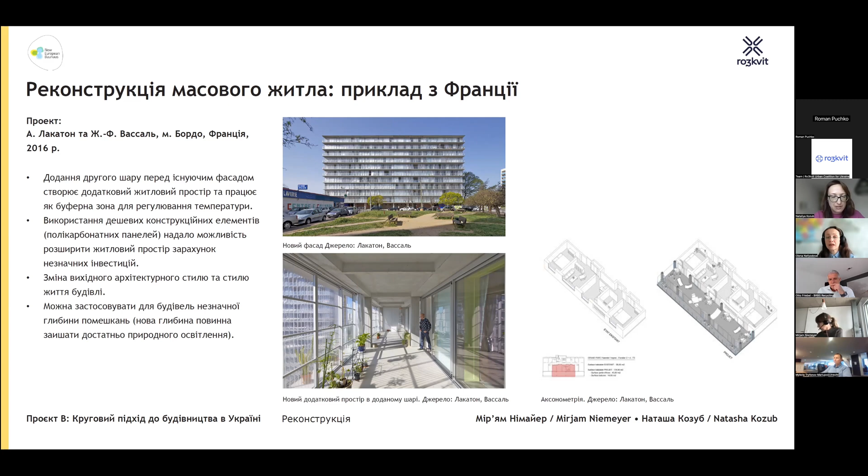This project cannot be applied to all of our panel buildings because it has its own special features. For instance, these flats are of low depth, and so when you add the gallery, we keep them lit enough. But this example can show us that every building can be approached in its own way to be made better.

This is an example from Germany, because in Germany we have quite a lot of post-war mass market housing. This used to be a 5-story building which featured 125 absolutely identical flats.

During the renovation, it was replanned and it got new galleries attached, and the upper floor got its own penthouse with a terrace. Even such sad buildings can be improved in their architectural qualities, and it is clear that these projects are not cheap and they require architectural planning.

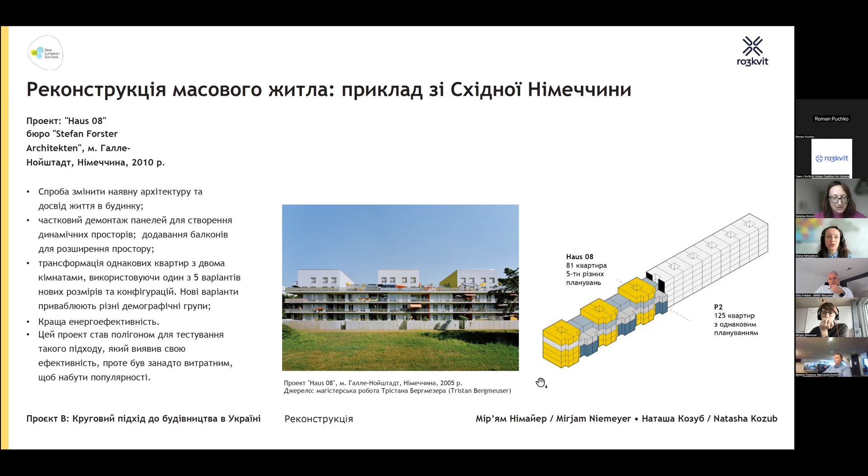And we know that in Ukraine, renovation of multi-story buildings is not conducted just because we don't know how, we don't have any projects. That's not the case. Our research shows that it is not performed because we lack legislation and we have property problems attached to it, but there are architectural approaches, and it is possible to preserve such houses and reuse them.

Then we had a look at one-family houses, especially rural houses, which were built after the war starting in the 1950s. This is called a typical rural house of Soviet times. Starting in 1990, around 3,800,000 people moved from rural areas to cities, and this means that quite a lot of rural houses stay abandoned, and they can be used to, for instance, house IDPs.

Yes, these houses have a lot of drawbacks. They are not energy efficient. Very often they are using asbestos containing materials, mineral cotton wool, rock wool, which is a dangerous material to use in your house. But for this slide, we are also showing the results of the dissertation of one of our colleagues from London Architectural School.

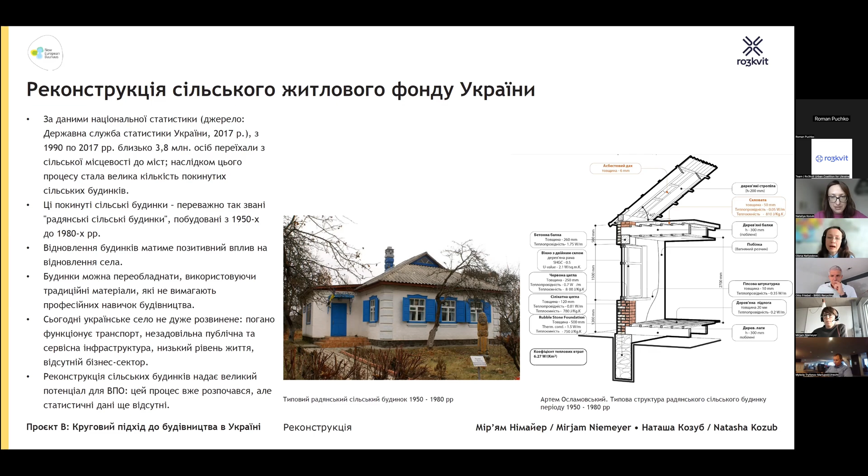Artem Oslamovsky showed that if you invest just a little money, the energy efficiency of such houses can be boosted greatly. So you can see coming from 6.21 watts per kelvin square meter, we can reach 3. So we can halve the energy consumption of such a house just by using specific materials for isolating its roof.

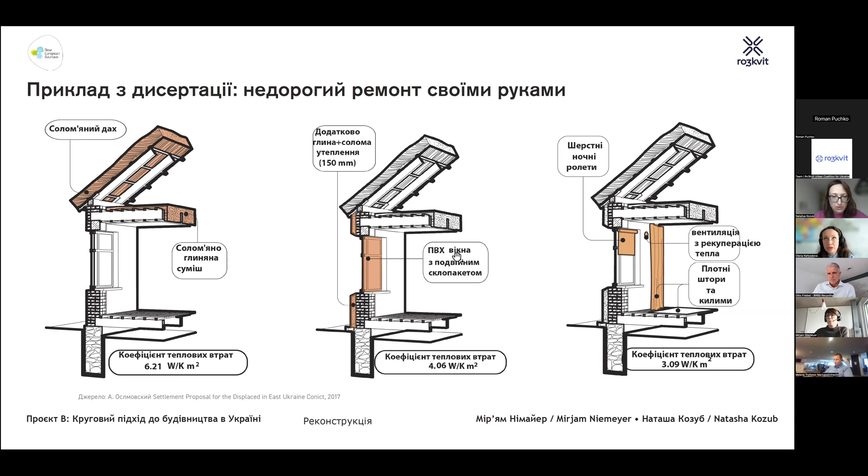So these changes, alterations are possible for people to do on their own, because the materials used include straw, include clay. So these are rather cheap, available and affordable solutions.

To move further on, we would like to talk about the reuse not of houses but of the elements, and I would like to give the floor to Mirjam here again. Yes, thank you, Natasha. Exactly. After talking about possibilities for renovation of existing buildings, we also focused on the potentials for the topic of demolished buildings. When we look at demolished buildings, it's relevant to talk about the reuse of building components and the recycling of building materials.

Here, can you go back? Still one. Oh, okay. I have another order. Sorry, I have another order. Maybe, yes, please this. In my version, I had another order. Okay. So first this and then go back.

So, of course, a very relevant topic is the reuse of concrete panels. The reason for it is that in Ukraine there is a lot of panel housing existing, so there is a high potential for studying the reuse of it. And in general, looking at other projects in other countries, studies found out that approximately 30% of panels can be reused as a structural element.

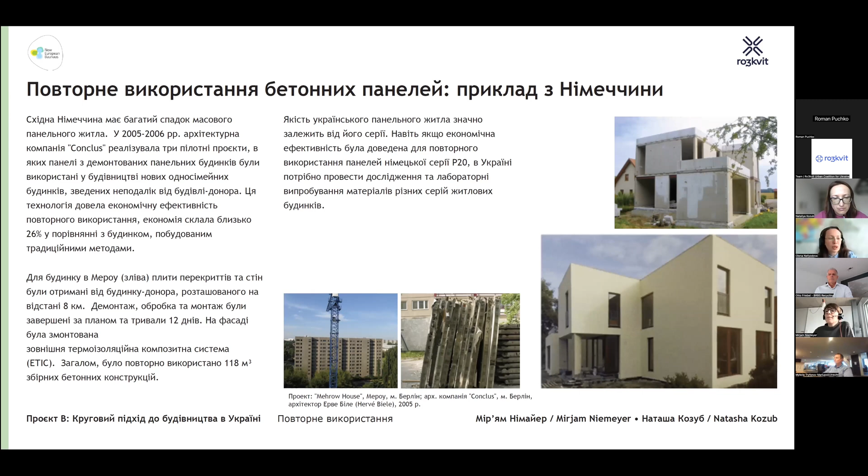After the next, yeah. Yeah. Okay.

So this slide is about the reuse of steel and structural components. That's also a very important topic, especially since steel is used in the context of industrial construction very often. The reuse of steel is also very relevant because it's a high energy demanding process to produce steel. So that's why the reuse of these structural elements, which are usually very easily assembled and also easily disassembled, has a big potential.

Of course, because steel also has structural qualities, certification is needed, but it was tested already in many countries to reuse such kinds of beams and structures. For instance, here you can see a project in Norway where, all in all, including also other materials, almost 80% of materials were recycled. Next slide.

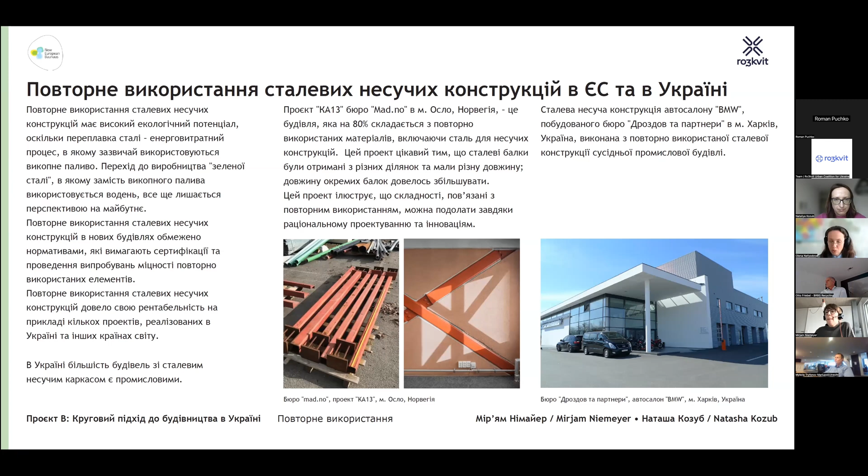Next slide. Another aspect when we look at building materials and components is, of course, our bricks. Bricks are usually already recycled in Ukraine. Maybe some of you know projects. Most important is that the bricks from younger times don't have so much quality, but the ones from the times before the 70s actually have a very good quality.

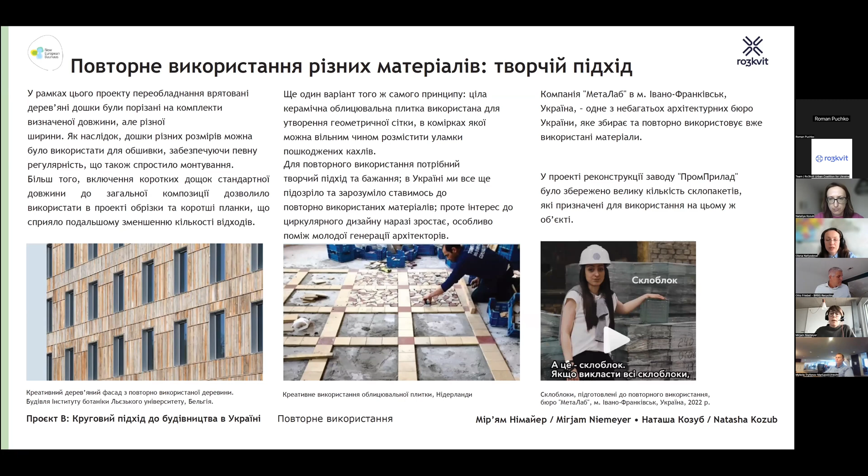Maybe I have again another order.

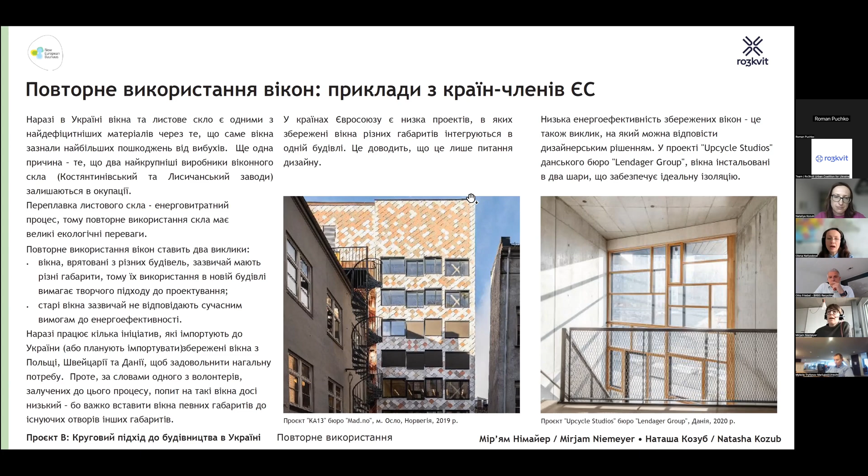And then on the right-hand side you can see another approach where different windows of different sizes were rearranged in a bigger glass facade. So then please go back to the slide before, or in my version the next slide.

So there are actually also examples of the reuse of windows in Ukraine already. This is an initiative from Switzerland which is gathering windows from construction sites and sending them to Ukraine, where they are already used in a series of renovation projects. Of course, in the first place, maybe it doesn't make so much sense because it's a huge work for transportation and also creates emissions.

All in all, the carbon emissions, when you look at these, are still lower. That's interesting. The reason is that production of glass is so high energy demanding. But looking at the scarcity at the moment in Ukraine, it's a very important project actually.

Okay, now back to Natasha, who will talk about, no, sorry, I have two more. So then, next slide, please. Sorry for the, yeah, okay, so destroyed buildings, yes.

So I want to also very shortly talk about the recycling of building materials. We have, of course, also looked at a general approach, what kind of waste is actually generated when a building is demolished. And looking at Ukraine, it's data from 2017. One can say that around 80% is concrete and masonry. And the rest is wood, PVC, gypsum, glass, wool. They are pretty low percentage. And looking at this, of course, concrete especially has a very high potential. Next slide.

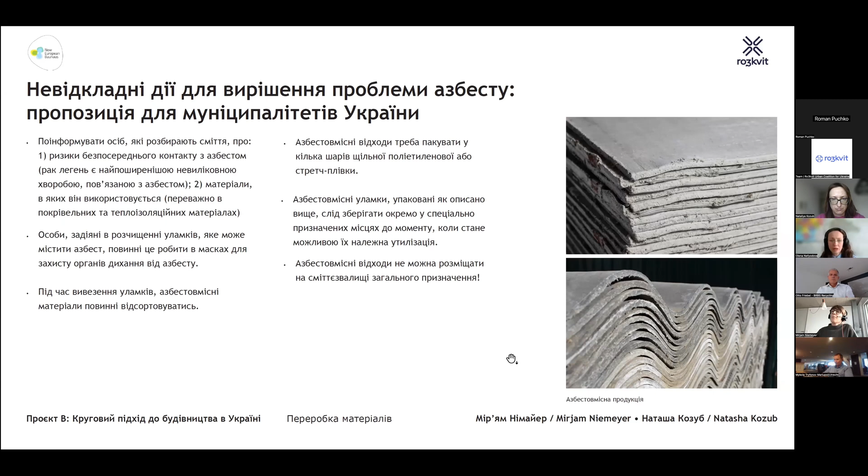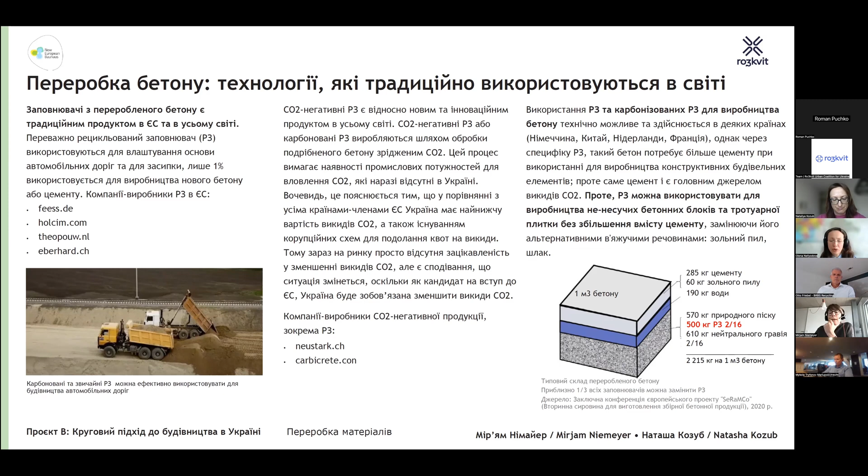So the next slide will be... it looks different now again. Sorry, Mirjam. What is it about?

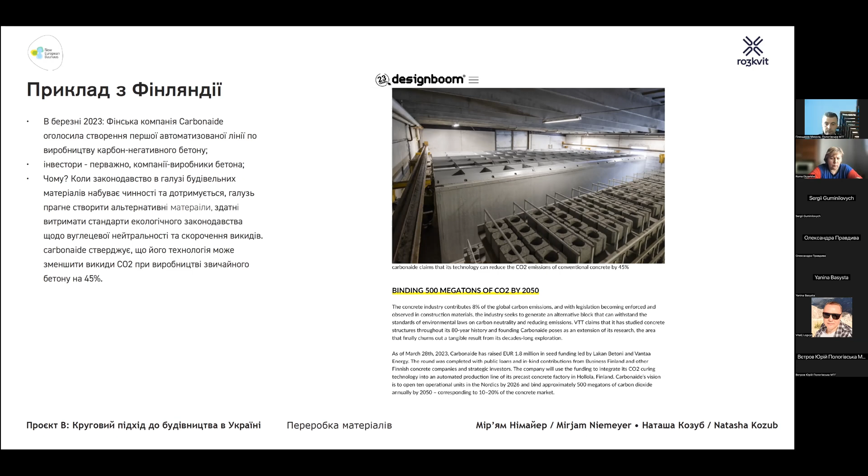Okay, now you have the smart crusher still in it?

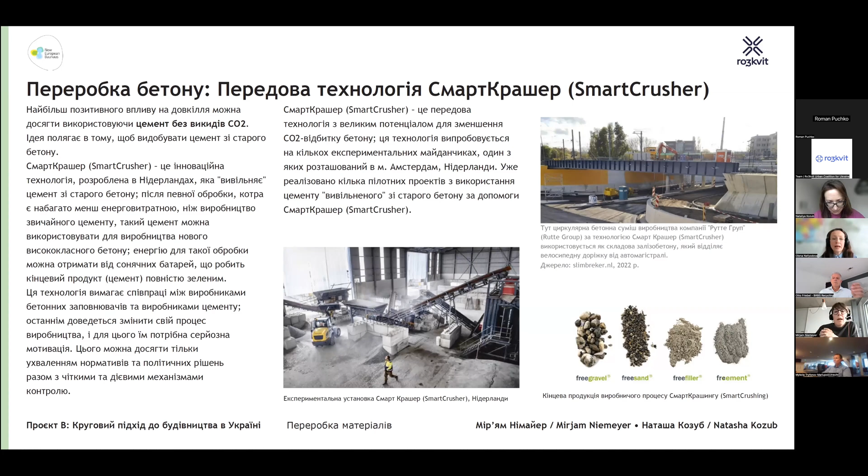Okay, now Natasha, it is your turn.

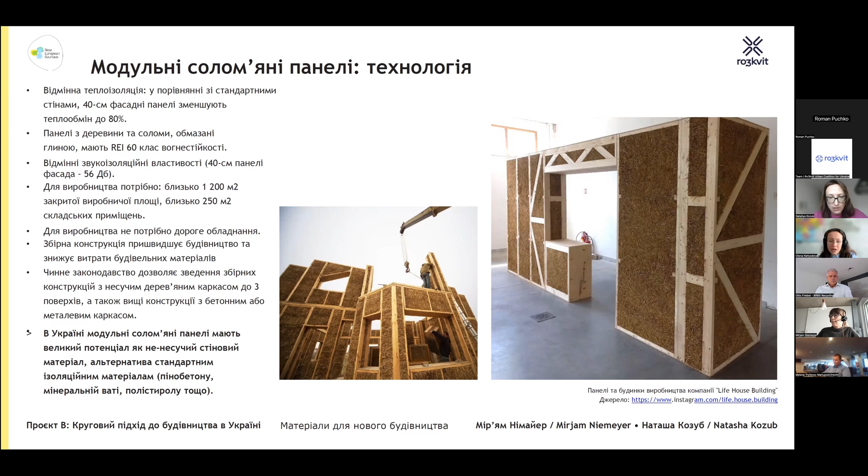We are doing the same from panels of pressed straw, which has a very high fire resistance class. So it is not burning. It is smoldering very, very slowly, and it is certified. At present, our legislation doesn't allow us to erect houses higher than 3 floors using straw, but if you use the hybrid approach, that is, you combine, say, concrete structure and straw walls, you can make it higher than 3 floors.

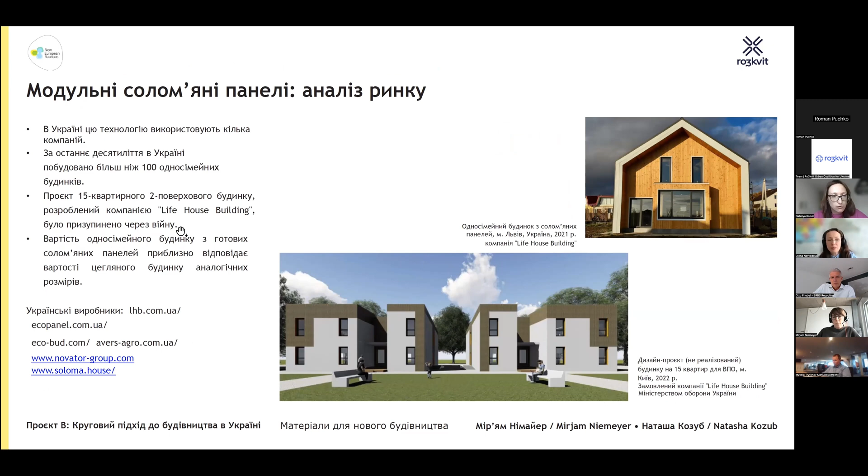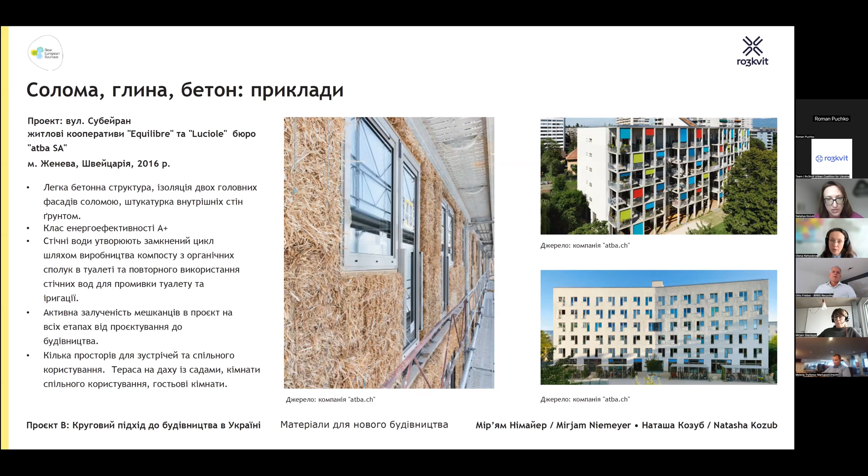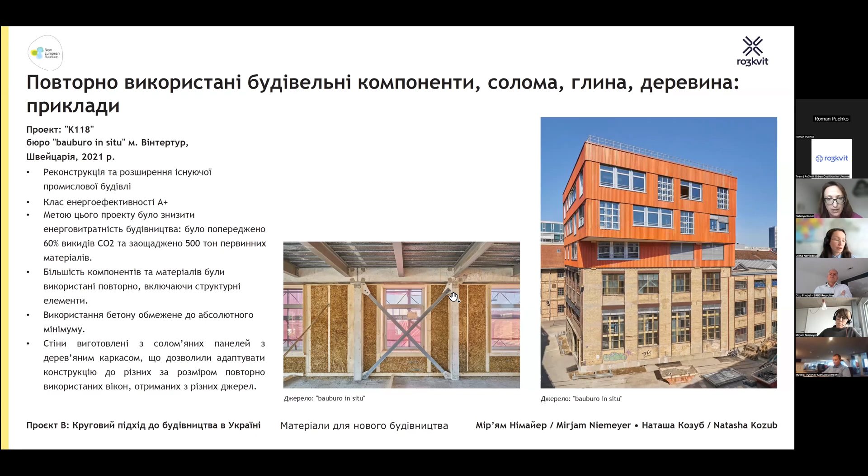It has a concrete structure and straw walls, and inside they are plastered with clay. The house is A+ class of energy efficiency. Another interesting thing about this house is that it is a housing cooperative and actually built by the residents. This is another example from Switzerland, and here it combines reused steel, reused concrete, and also newly produced straw panels which are plastered with clay.

And another interesting material is hemp, and it is also grown in Ukraine, not to a large extent because the legislation prevents it, but hemp can be used for making hemp concrete, and this mixture of lime and hemp can be used to cast in situ the walls. It is a brilliant material for thermal insulation.

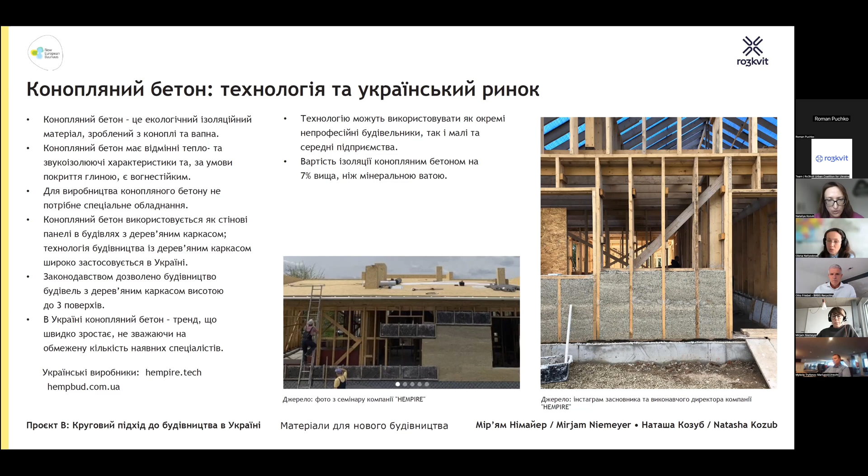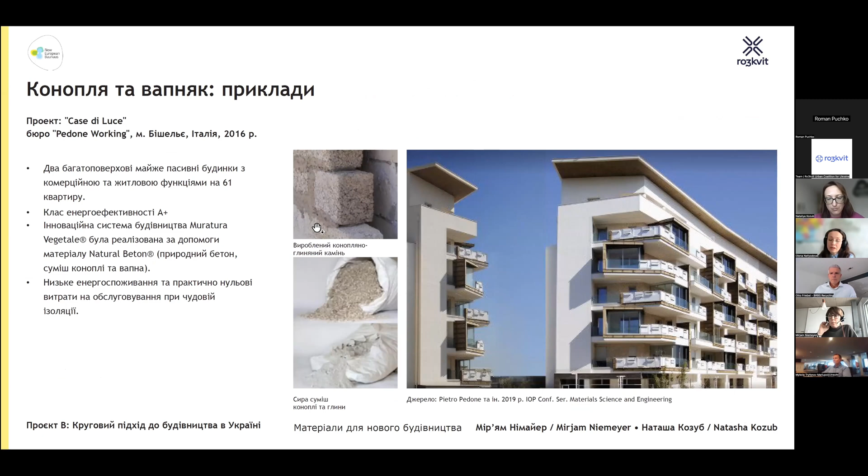And in the middle, you can see the photo from the webinar, which was conducted in Lviv region. And this is the house for IDPs. So hemp and lime. Here is an example from Italy. Again, this house has a concrete structure, and the walls are made from hemp and lime.

Timber clearly is a good construction material, a good circular material, but even before the war, we had a certain deficit of timber resources. In many regions, we had few forested areas, and so if in the future we are building only from timber, we will not grow it fast enough. So our idea is to use timber only when it is necessary.

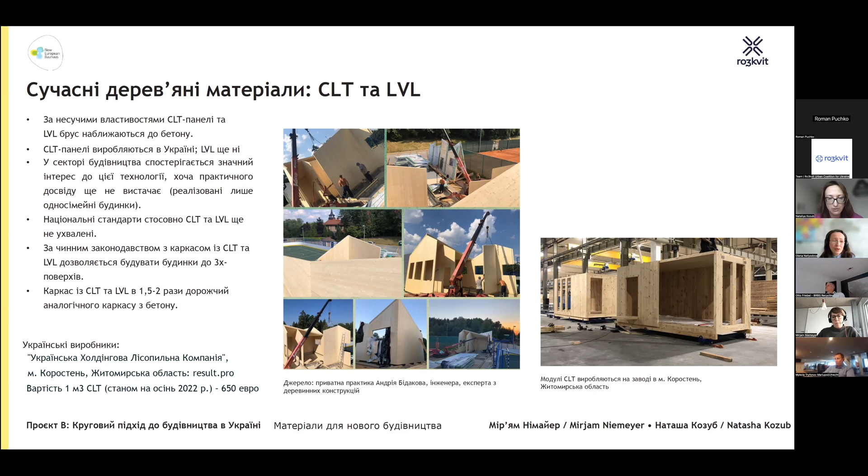For instance, today we have very popular technology of CLT and LVL beams. CLT is cross-laminated timber, or glue lam timber, and these are composite timber materials. We have a plant producing them in Ukraine, but it is rather expensive, and the structures would be approximately 1.5 times more expensive than concrete constructions, so it would be rather expensive to use them as structural elements, though it is very interesting, of course.

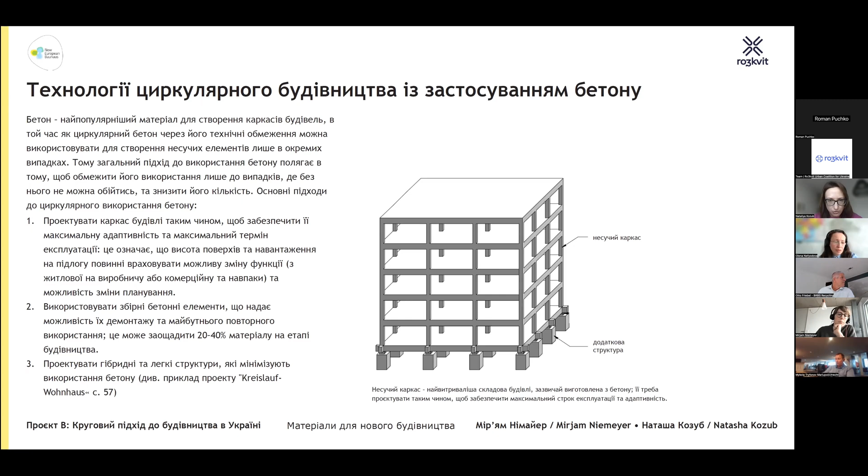And traditionally we built a lot from concrete, and many people are now saying that we must embrace only cast in situ concrete because in the future the houses must sustain missile strikes. But yeah, we will have to embrace it. Yet our idea is that concrete is not ecological. Concrete pollutes the environment, being responsible for 8% of carbon emissions, and so we must reduce concrete usage to the minimum. Or if we're using such structures, then we must ensure that they are long living.

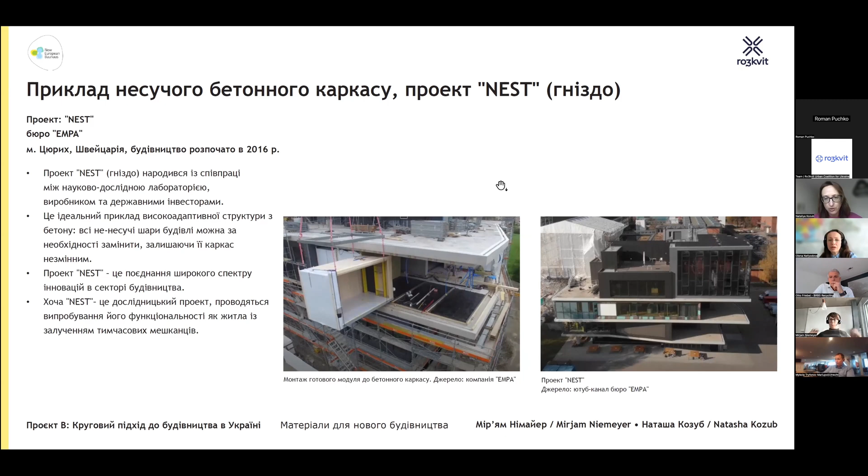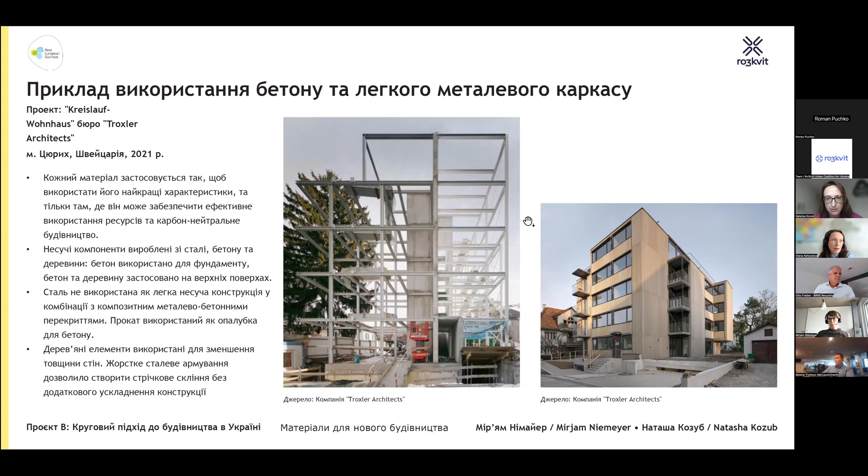For instance, if the house is morally aged, then we can substitute everything but the bearing concrete structure. You can see it here. The bearing structural frame is built of concrete, and then it is filled with living modules, like books on a bookshelf. And this is a very interesting project in which concrete is used only for the foundation and one wall in the middle, and the rest is done in steel. The slabs will be made of concrete, but used together with metal formwork, so it minimizes the use of concrete.

And because we have enough research that has been done, we have technologies, the only thing we need to do is to use it. And another thing, in Ukrainian construction, we have mostly small and medium-sized businesses, so for them it is easier to embrace circular economy, and this also is a potential. Thank you.

And the last phrase, can I say it? Thank you. Yes, you may.

I would like to say that as a Ro3kvit coalition member, I can see that European companies try to start pilot projects in Ukraine focusing on circularity, and Mirjam and I are preparing such a project supporting companies from Denmark and Norway. And so this is not hopeless.